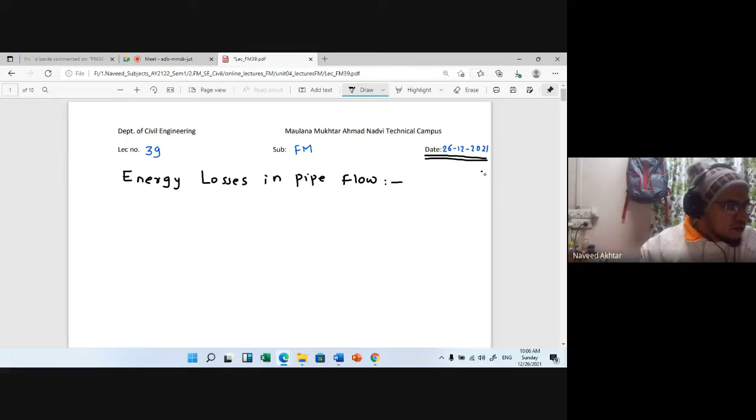The major loss of head in a pipeline, whereas loss of head due to changes in pipe section, bends, fittings, valves etc., constitute what are called the minor losses of head. We have already seen this: the major loss is due to friction loss, and minor losses are due to bends, change in cross section, and exit or entry to the system.

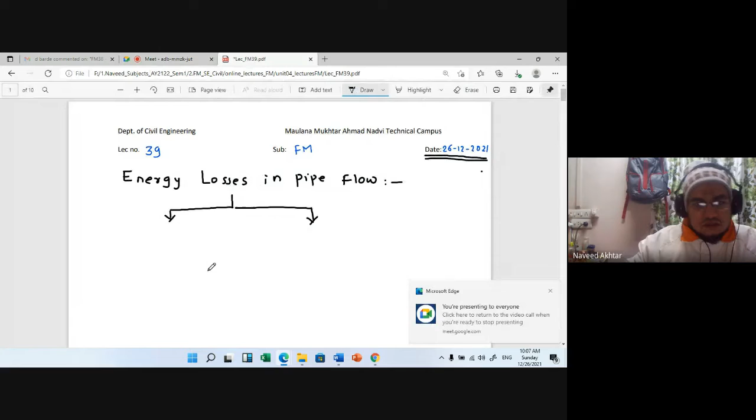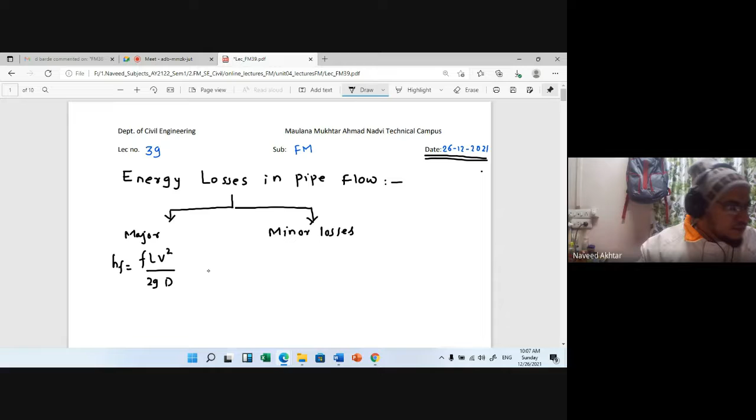So this major loss in terms of friction factor we find out with the Darcy-Weisbach equation, that is F L V square upon 2GD. And there are many minor losses which depend on the length of the pipe and diameter of the pipe, etc.

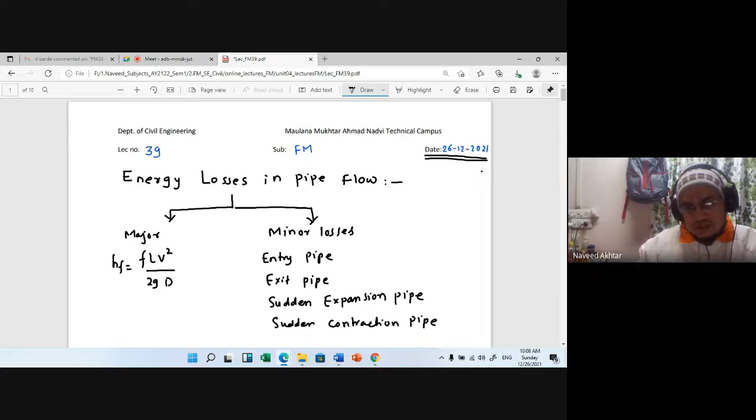These minor losses are nothing but: loss due to entry to the pipe, exit to the pipe, sudden expansion of pipe, and sudden contraction of pipe. The sudden change in diameter of the pipe means, if smaller diameter changes to larger diameter, it is sudden expansion, and if from larger diameter to smaller diameter, it is sudden contraction. This loss is due to the contraction or expansion of the pipe.

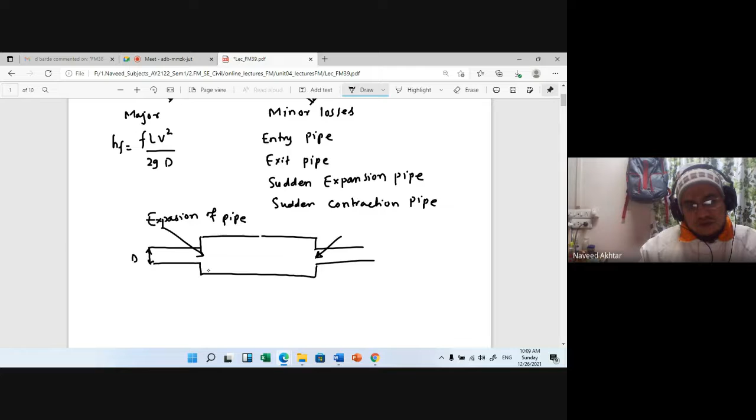Consider a pipe with smaller diameter D1, then D2, then D3. From D1 smaller to D2 larger is the sudden expansion case. At entry of the pipe there is loss, at exit of the pipe there is loss, and between the pipes there are friction losses, which we denote as HF. So HF is the friction loss into the pipe. These are the major and minor losses into the pipe.

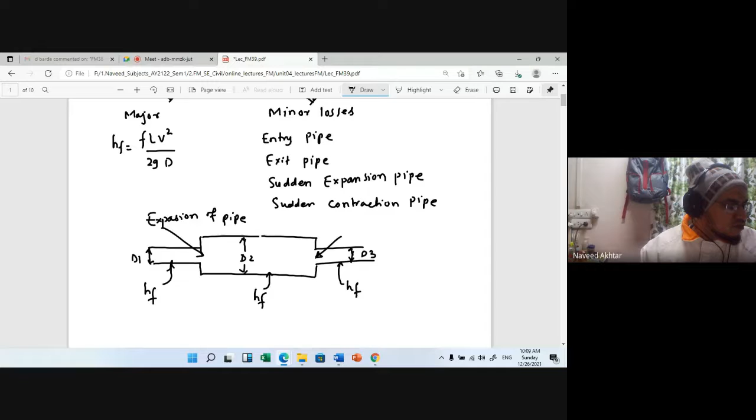We know that the equation for the Darcy-Weisbach friction loss is HF equal to FLV square upon D into 2G. I will call this equation number 1.

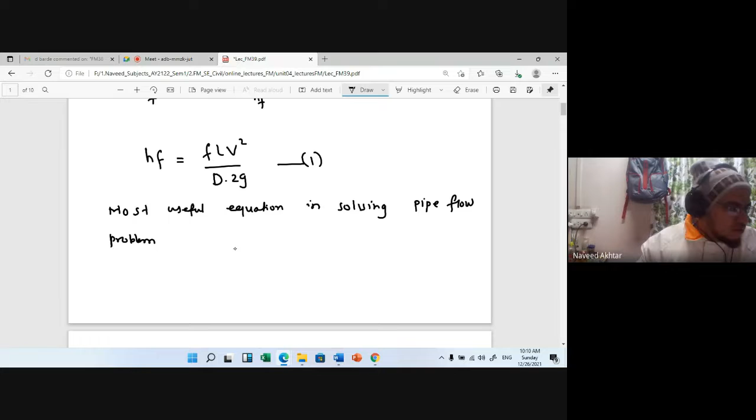The most useful equation in solving pipe flow problems is Bernoulli's equation, or Bernoulli's theorem. It states that Z, the datum head, plus P upon gamma, the pressure head, plus kinetic energy head V square upon 2G, is equal to constant, which is Bernoulli's theorem.

This is to be applied to a specific point. If applied at two specific points of a pipe, for two sections of the pipe having a length of L apart, one along the pipeline, then it can be written as follows.

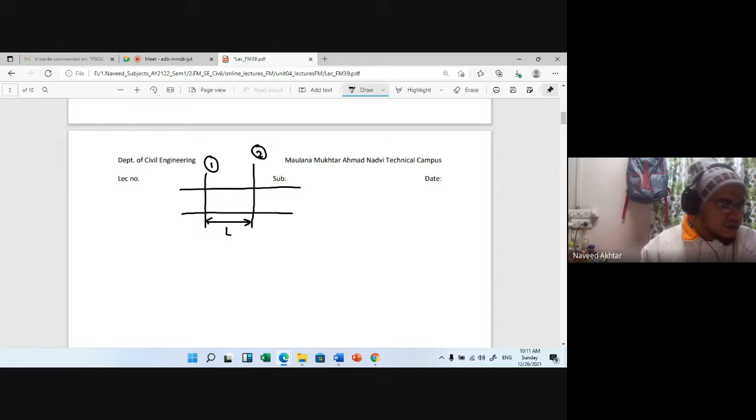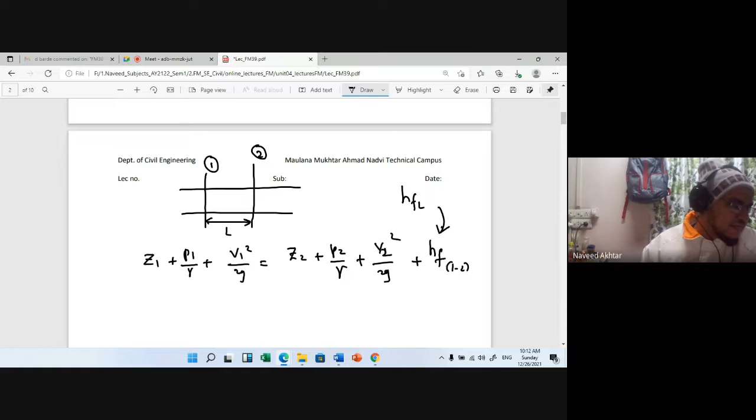Z1 plus P1 upon gamma plus V1 square by 2G is equal to Z2 plus P2 upon gamma plus V2 square upon 2G, plus HF between 1 and 2, the distance apart being L. You can write this as head loss HFL, or HF between 1 and 2. This is nothing but the Darcy-Weisbach equation form, the major head loss due to friction.

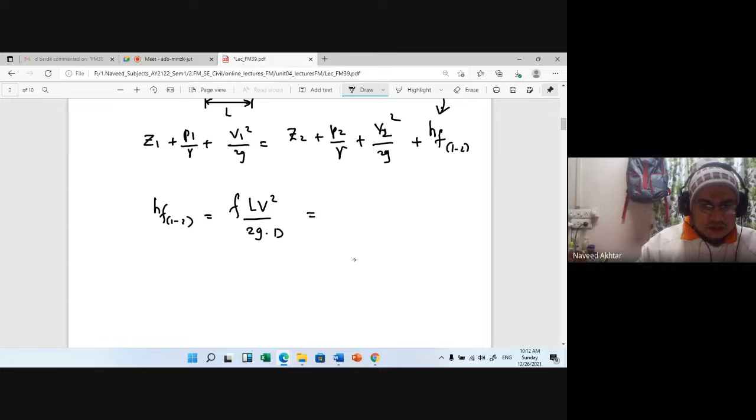It can be said that the major loss of head due to friction is caused by the flow of liquid over a pipe of length, which we denote with capital L.

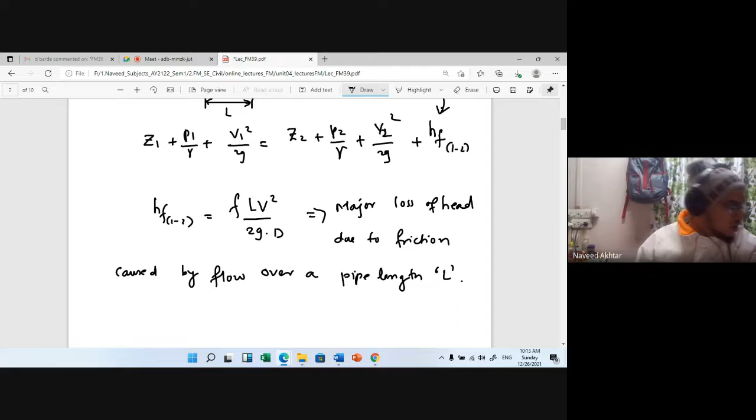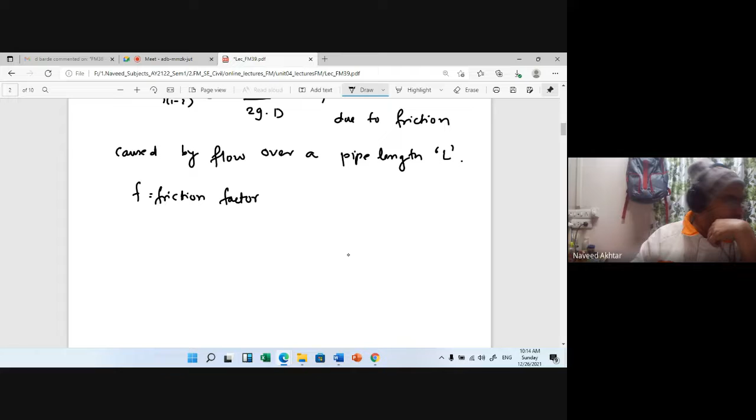Here the F is nothing but the friction factor. We have seen that this F is not specified; its value can be taken in between 0.015 to 0.02, and preferably it is taken as 0.02.

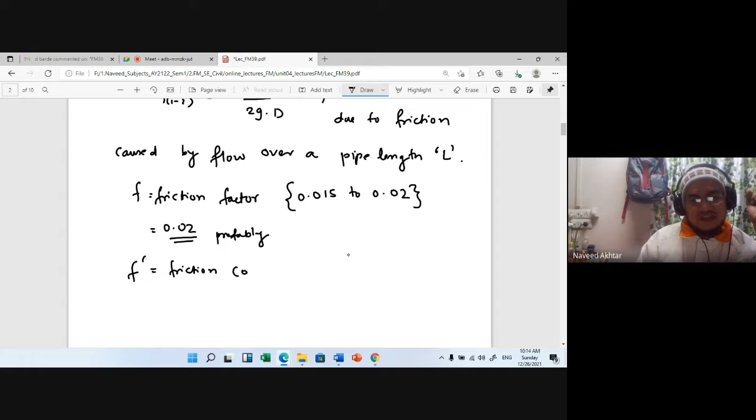But in case if friction coefficient f dash is given instead of friction factor, we are using the formula: f is equal to 4 times f dash. So f dash is equal to f by 4, or you may write it as 0.25 of f.

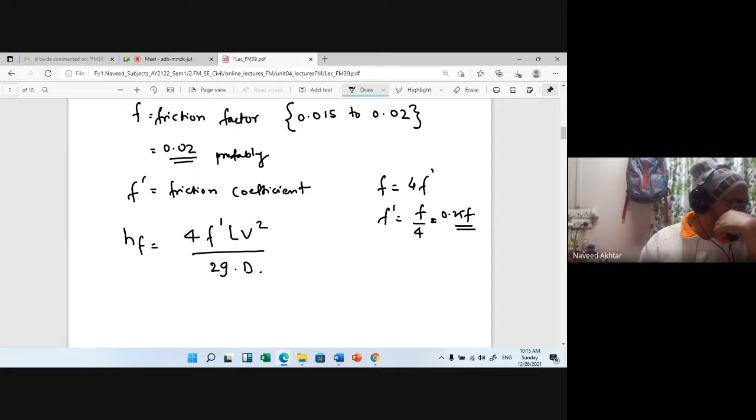So you can write down this formula for the head loss between the pipe flow sections 1 and 2: 4 f dash L V square upon 2g into D. The f dash value, remember, it is 0.005.

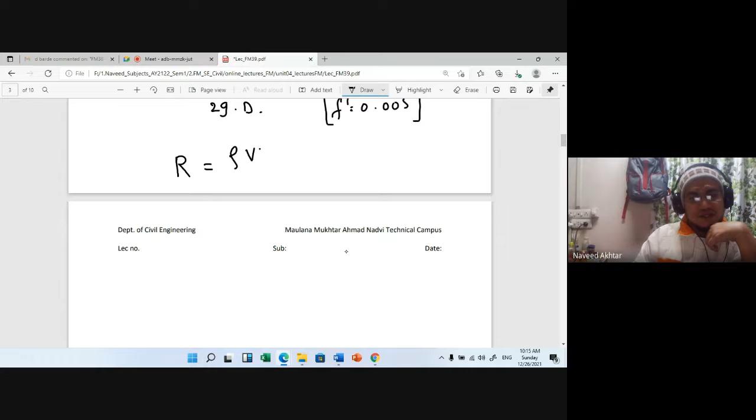Reynolds number is the most important number for a pipe flow system, and it's calculated as rho VD upon mu. This we have already seen in previous units. Reynolds number proves the flow pattern, so it is very important to differentiate between laminar, transition, and turbulent flow. It depends on the inertia force and the viscous force.

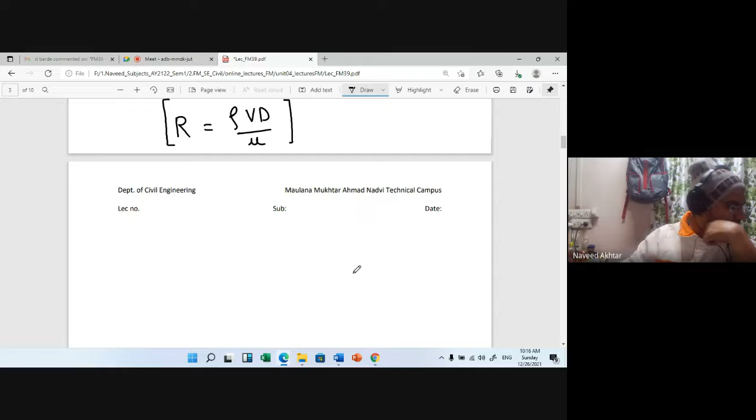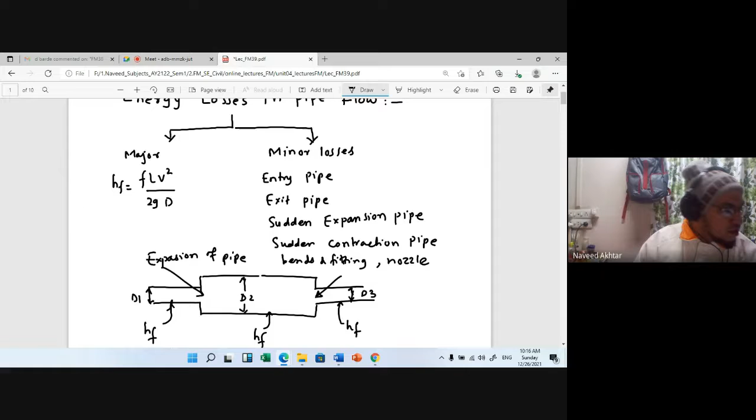Head losses occur on account of sudden contraction, sudden expansion in the pipe, and with pipe bends and fittings. These are the minor losses; major losses we have already seen. Bends, elbows, T-joints, and nozzles cause minor losses. This is already covered as the major loss we have seen in previous lectures, using the Darcy-Weisbach equation for the head loss.

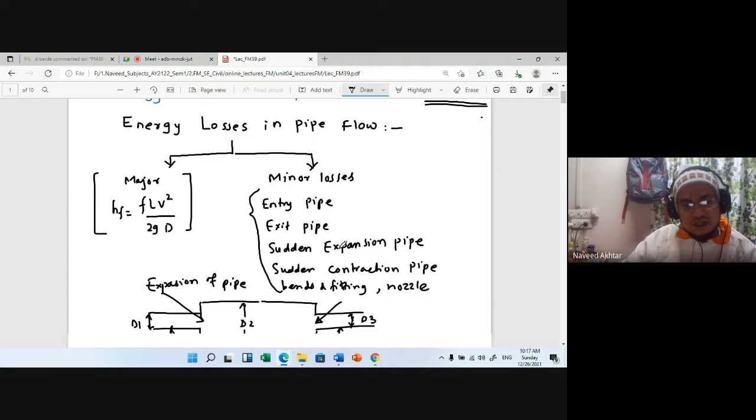Now we will see today the sudden expansion and sudden contraction of the pipe losses, that is, minor losses. From this derivation we can also derive other losses. So first we will go for...

Students, they are joining late. If I miss your attendance, don't mind, because you are disturbing the class.

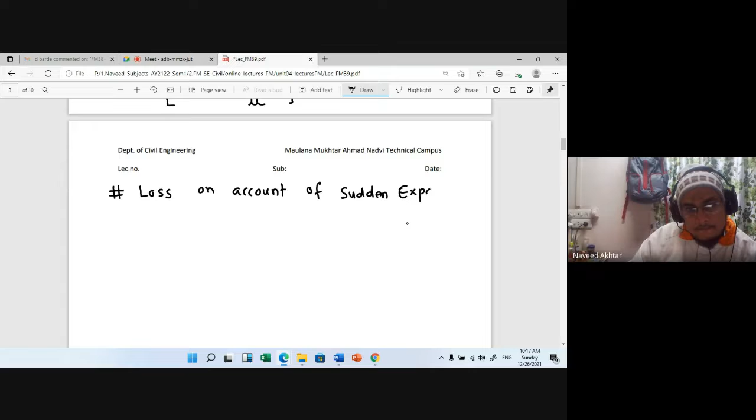So we will see first the minor loss on account of sudden expansion, sudden expansion. For that we have to draw the figure.

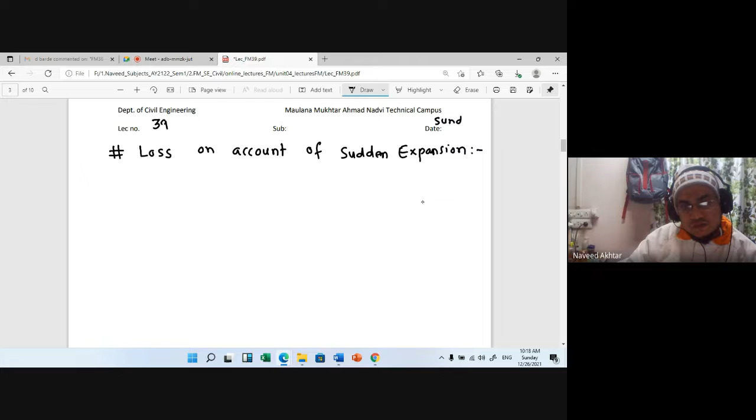Draw the figure first, draw with me. Draw this figure showing flow through the smaller pipe. Suddenly what happened? A change in the dimension of the pipe occurs — the smaller pipe merges with the larger pipe.

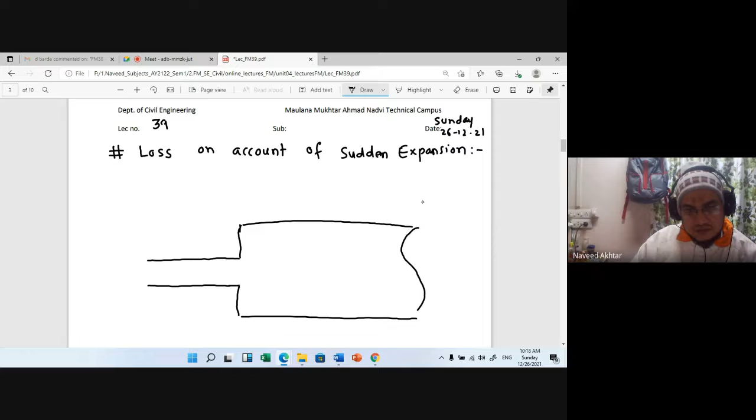The smaller pipe merges with the larger pipe. This is your pipe — smaller diameter pipe merging with the larger diameter pipe. So you have to draw this figure, please draw carefully.

The discharge flows through the pipe of diameter D1, the smaller diameter pipe. The large diameter pipe I will write as D2 — capital or small letter, depends on you. And I will take three sections here, starting with Section 1.

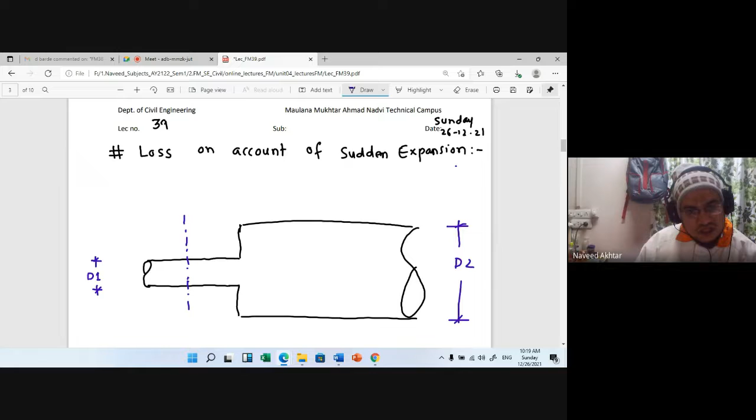Section 1 is at the smaller diameter pipe. One other section I will take where the vortex formation occurs. Then another section I will take at the change in diameter, from smaller to larger pipe, and I will call that Section 2. So this one is Section 1 and this one is Section 2.

The liquid or fluid is flowing through the pipe. Because the pipes are in series, the discharge will not change. In the first section, it is moving with velocity v1. Then the discharge Q continues and exits into the pipe, having velocity v2 in pipe 2.

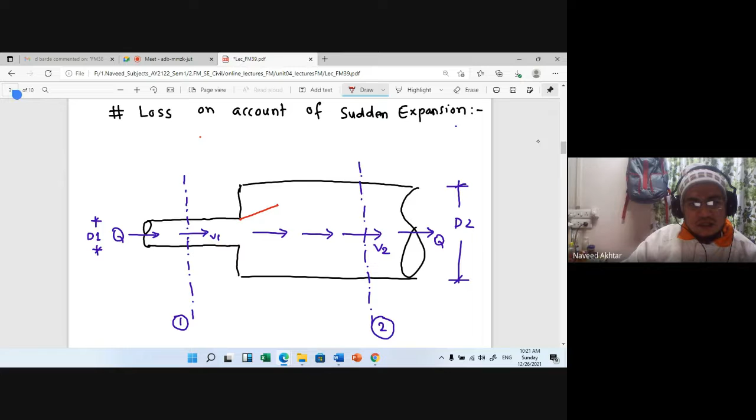So this is the flow through the pipe. I will also draw this liquid flowing through the pipe. Then, due to the sudden expansion, what happens? The flow also expands until it reaches Section 2. This is the flow.

This merges with the same diameter of pipe 2 at Section 2, where it will also be broken. So gradually the flow reaches and adjusts itself to the diameter of the pipe, and vortex or eddy formation occurs due to this sudden expansion of the pipe.

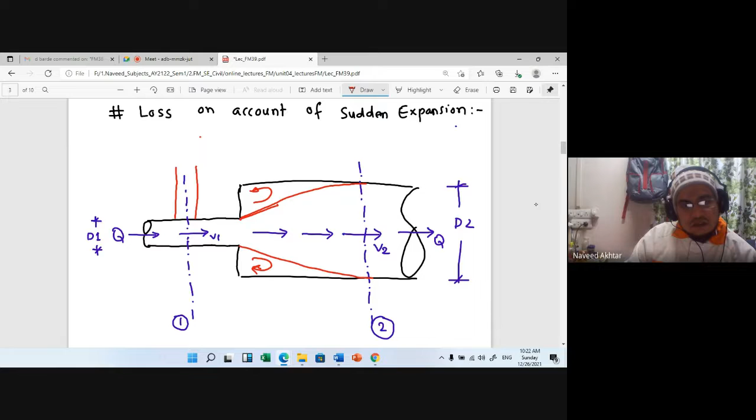So these are the sections, and if you measure the head, you can see the pressure head here, the pressure head here, and the pressure head at Section 2.

Okay, so the level maybe at the start it will be here, then it will slightly increase here, and here also due to the enlargement of section it will increase here. So I will dash this level of the pressure level of the pipes with the bottom. Okay, so this from the center of the pipe, this one, the pressure head P1 upon gamma, and here from the bottom you can write down from here to here it is P2 upon gamma, that's pressure head, and then if you draw the diagram, it will be like this, and it changes. Okay, and the control volume I will write down this from A, section A, then B, C.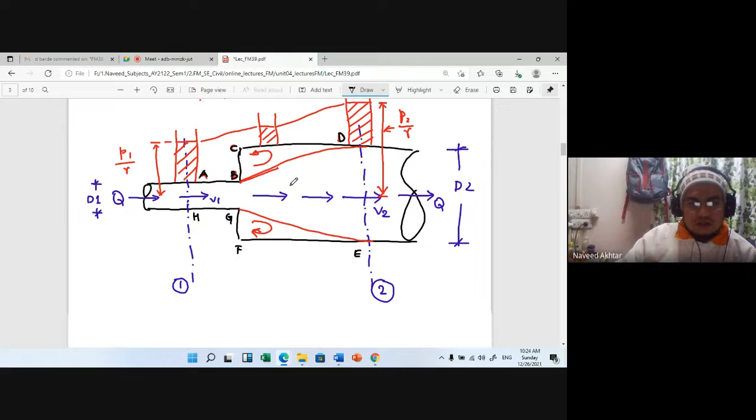Here diameter is changing here. Okay, diameter is changing A, B, C, and then here I will write on this D, D. Or better I will change the color. Okay, understand. A, A, B, C, D, and here I will say it is E, F, G, and H. So this is control volume, and this figure is very important. This figure you have to draw carefully. I think so. This figure is clear to you.

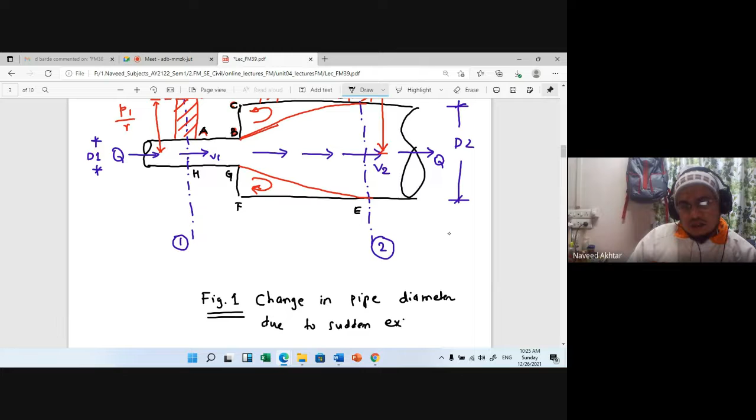Uh, you can consider a pipe. I will not write the description, description you will get in my notes. So here you can see the consider a pipe of diameter d1 has to get enlarged suddenly to the diameter pipe d2. Then at entry into the large pipe, we find that lot of turbulence and eddy formation coupled with the loss of energy. Yeah, due to sudden expansion of pipe. This is mainly due to separation of streamline from the boundary as the velocity in larger pipe for same discharge through smaller larger pipe will be lower.

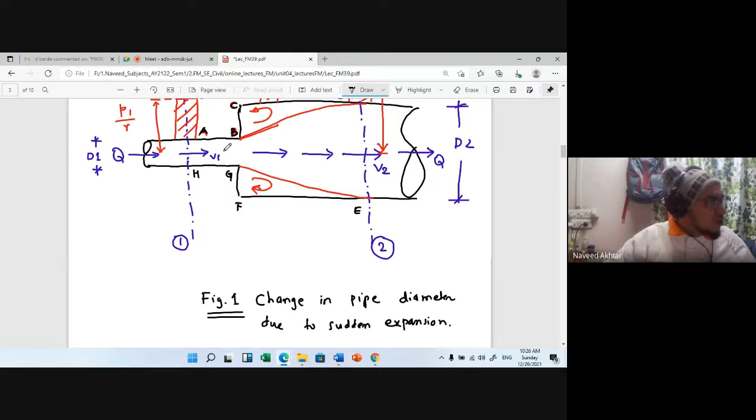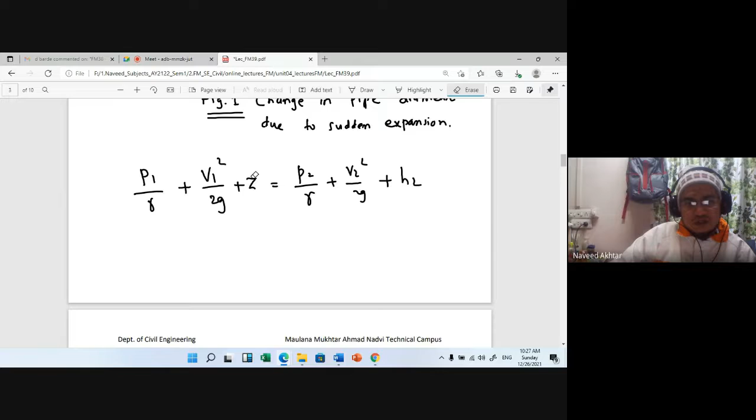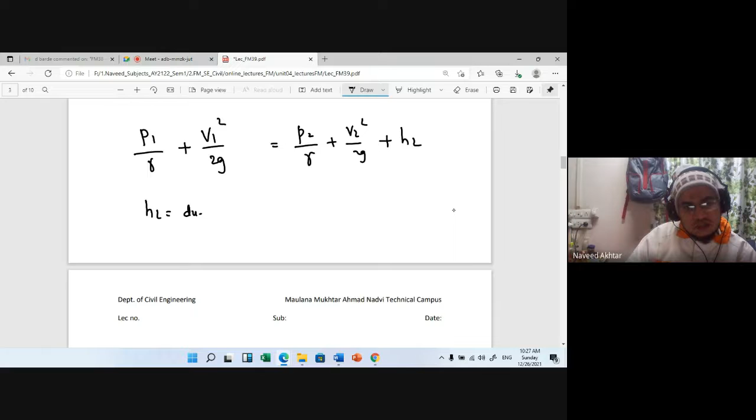So velocity will be reduced from the smaller pipe to the when it converted to the larger pipe. The velocity will not be same. Okay, but the pipe is horizontal, therefore the datum is same. That is Z value will not be considered in the Bernoulli's theorem. So this will be clear from the application of Bernoulli's theorem between section 1 and 2 as shown in the figure. So if I write down the head, Bernoulli's equation for this sudden expansion: P1 upon gamma plus V1 square upon 2G, because Z is same, P2 upon gamma plus V2 square upon 2G and plus this loss. So this Z will not be there, it is same due to the horizontal line. So no need of writing this, as in the case of Bernoulli's equation we are writing. So datum is same, and the datum head Z is same as pipeline is horizontal, and HL is the loss due to sudden enlargement. So this is HL here, and loss due to HL is due to sudden expansion into the pipe diameter.

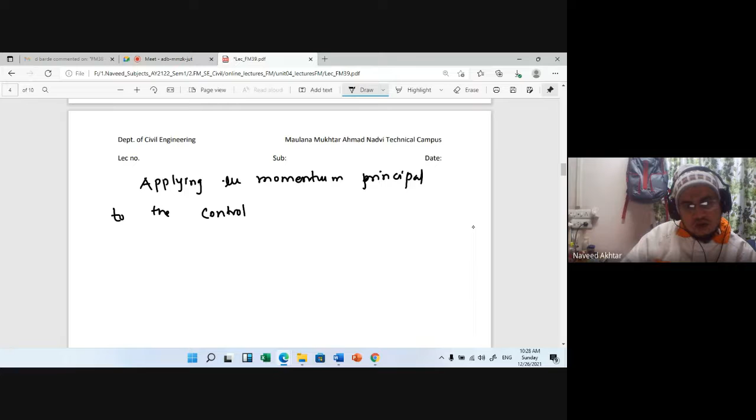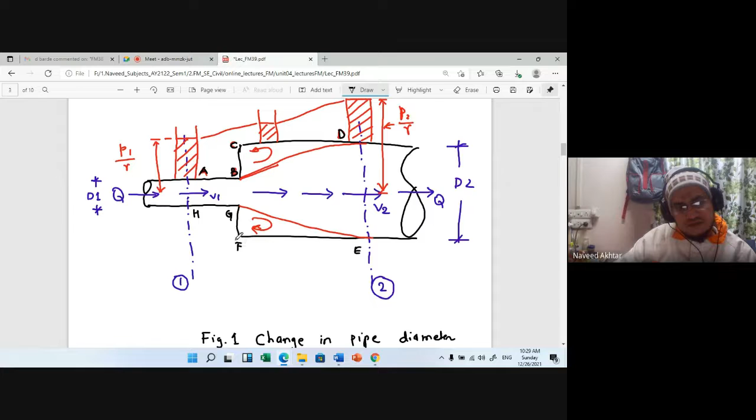Now applying the momentum principle, applying the momentum principle. Only momentum principle, you know, M into V, M1 V1 is equal to M2 V2. That is the momentum principle, to the control volume. We are considering from A, B, C, D, E, F, G, H. This is the control volume, from this equation you can see from A, B, C, D, E, F, G, H. This is the control volume. Okay, we are considering for the study, and assuming that the annular space CD and GF...

Here's the equation: rho into Q into V2 minus V1 is equal to P1 A1 plus P1 into A2 minus A1, the change in the diameter. So larger diameter is A2 and smaller is A1. So A2 minus A1, minus P2 A2. Okay, so if we write down this P1 A1 plus P1 A2 minus P1 A1 A2 minus P2 A2. Okay, so P1 A2 minus P1 A1. P1 A1. Minus plus, this will be cancelled. So it will be P1 minus P2 into bracket.

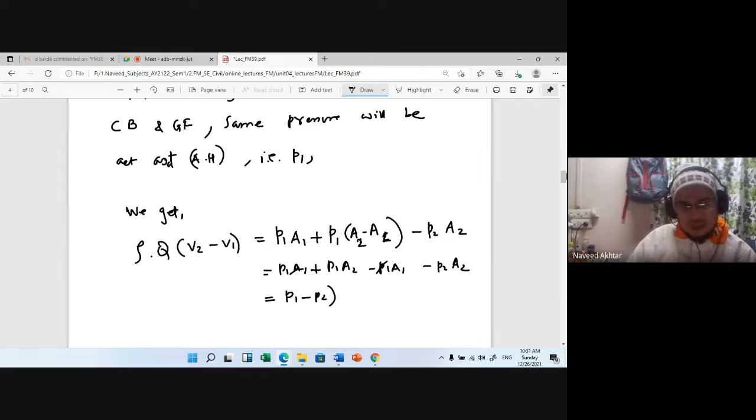This is A2. So if I will write down the term in terms of the pressure head, that is P1 minus P2, change the pressure head, section 1 and 2. So this A2 will become here rho into Q by A2, in bracket, V2 minus V1. Now, as we know, average velocity V2 is equal to Q upon A2. So I will write down P1 minus P2 is equal to rho into V2, V2 minus V1. Okay, so if you write down the HL, the head loss due to the sudden expansion, if you write down the P1 minus P2 upon gamma plus V1 square minus V2 square upon 2G. Okay, this equation from equation number 3, earlier we have written here.

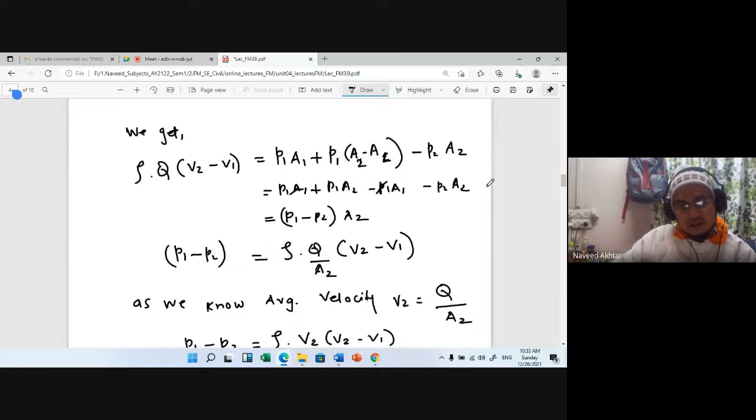Here it is on the equation. From this equation, from the equation you can, in terms of HL, write down P1 minus P2 upon gamma plus V1 square minus V2 square upon 2G.

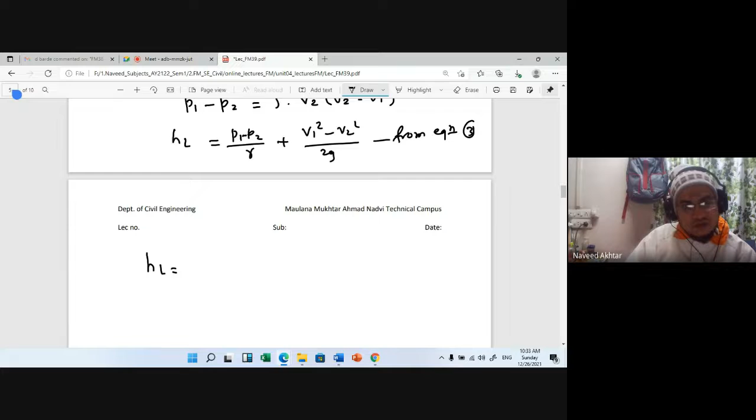So likewise it is just written here the same equation in terms of HL. Now we know the P1 minus P2 value, you can put the P1 minus P2 value. We have just calculated, that is rho into V2, V2 minus V1 upon gamma.

And you know gamma is nothing but rho into G. So I will write down here rho into G, plus V1 square minus V2 square upon 2G.

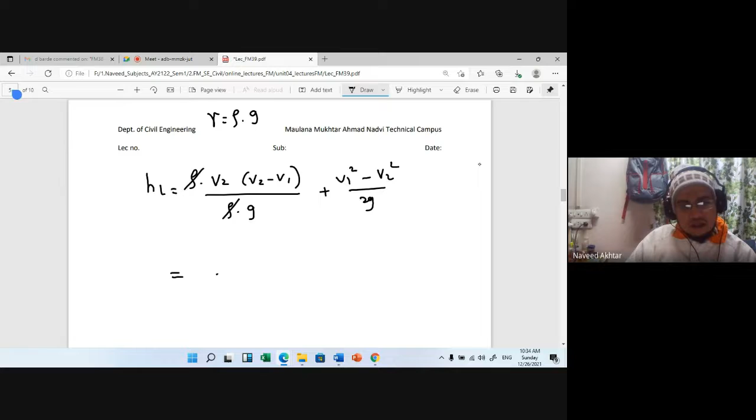Now this rho will be cancelled. So I will take 2G common. So here G is there, multiplied by 1, this value will multiply by 1, and this will multiply by 2G.

So it will be, if you write down, if you have taken the 2G common, so it will be multiplied by 2. So 2V2 square minus 2V2V1, plus V1 square minus V2 square. So these two terms are having same, 2V2 square minus V2 square is nothing but V2 square. I will write down V2 square minus 2V2V1 plus V1 square upon 2G.

Now you know this mathematical term. If you expand, I will just show for mathematics, then you can understand that A minus B, A minus B whole square. So what will we do? A square minus 2AB plus B square. This is the mathematics.

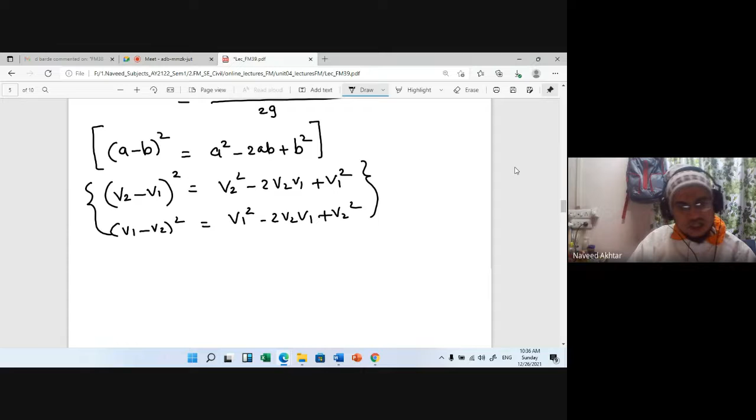Write V1 minus V2 square, it will also be the same, V1 square minus 2V2V1 plus V2 square. Either you write this or this term, no issue, but the higher value will be written first. So you can write down this HL is equal to V1 minus V2 whole square upon 2G. This is our equation number 4.

This mathematical term you should know. So if I will write here, you should understand that this is higher velocity minus lower velocity, whole square upon 2G, is nothing but head loss due to.

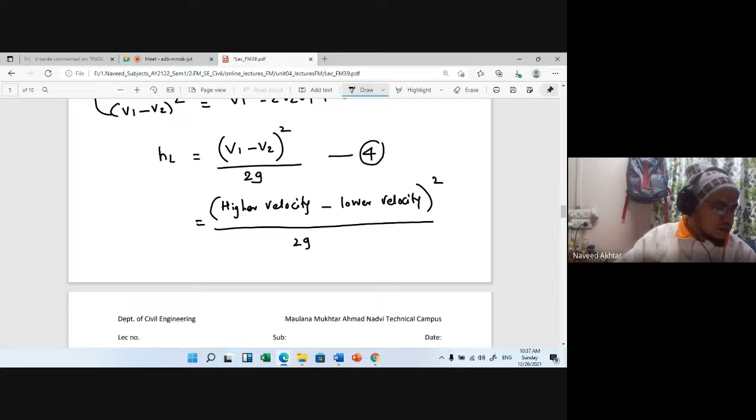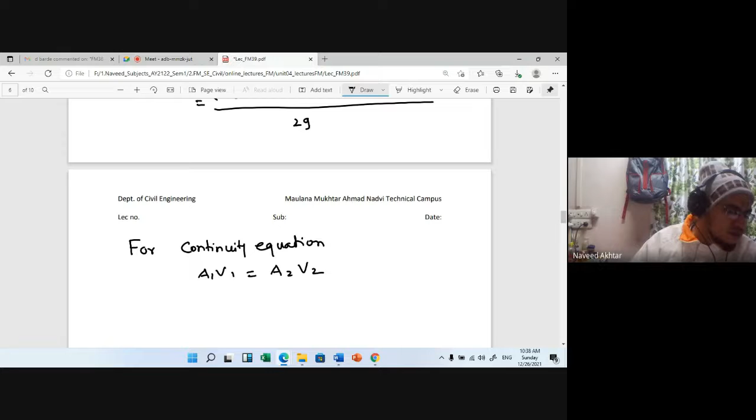Now we know that, for continuity equation, for continuity equation of the control volume, you can say. So you know that A1V1 is equal to A2V2, because discharge is constant in the pipe in series. So you can write down like this.

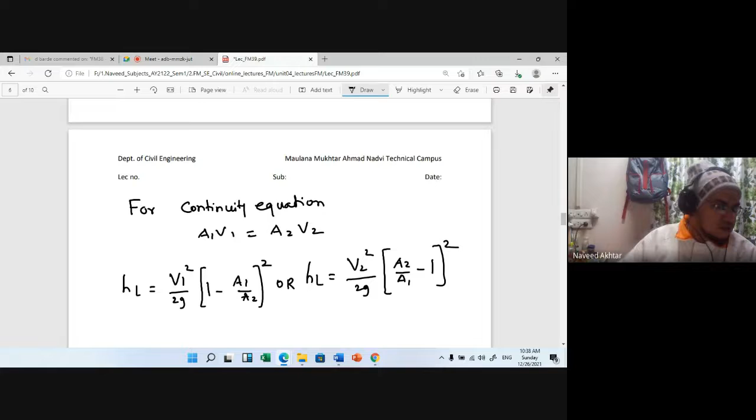If you put it in terms of V1 only, for your HL in terms of V1, V1 square upon 2G, it will be 1 minus A1 upon A2, the bracket square. Or you can write in terms of V2, so it will be HL is equal to V2 square upon 2G, but here it will be reverse, A2 upon A1 minus 1 whole square. So any of the terms you can say, it is equation number 5.

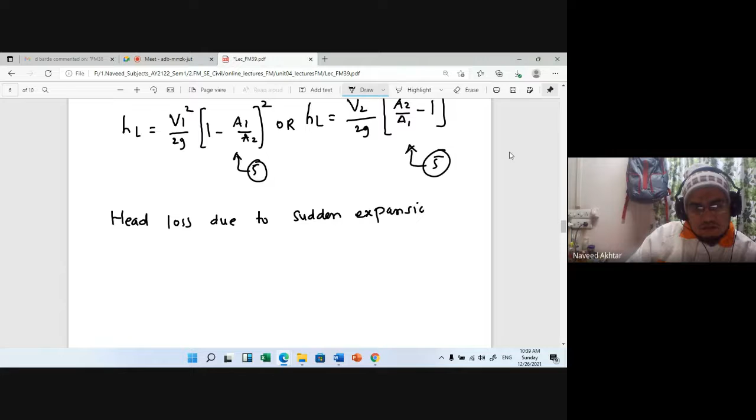Equation number 5. So head loss due to sudden enlargement is given by: head loss due to sudden expansion or enlargement of pipe is given by equation 4 or equation 5. So this is nothing but loss of head due to sudden expansion.

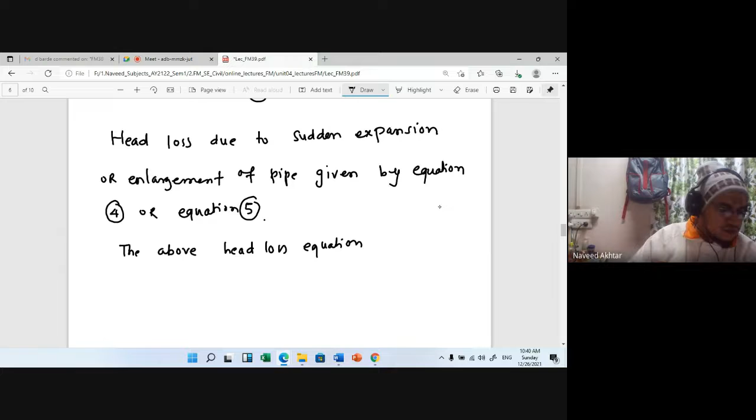This was first developed by, the above loss equation was first obtained by the scientists Borda and Carnot. That's why this equation is also known as, hence it is known as the Borda Carnot equation, head loss equation.

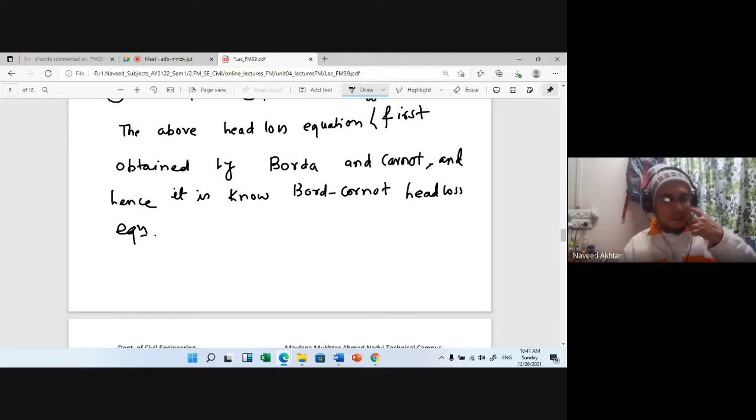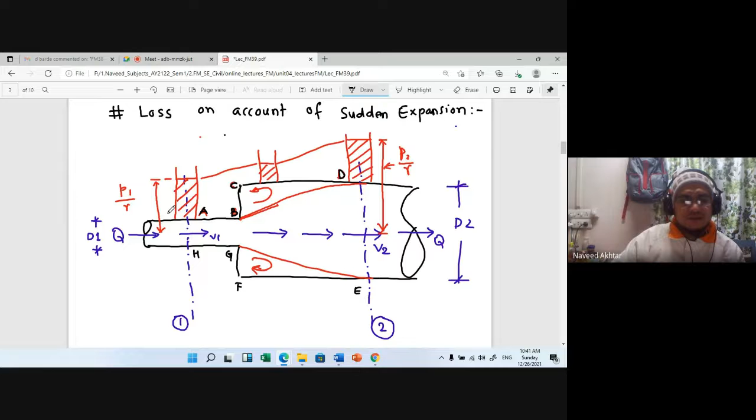So this is nothing but due to the sudden expansion of the pipe. Now, if you see this is due to sudden expansion, and exactly the opposite case happens if the pipe is large and then the diameter of the pipe is reducing. So that is called sudden contraction.

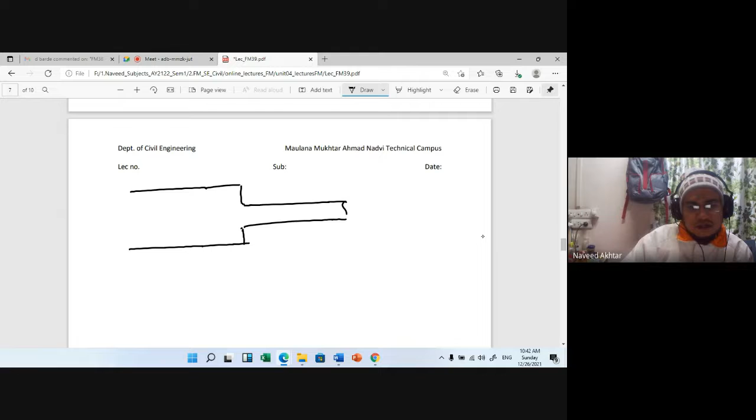So in sudden contraction, what happened? This is the pipe having large diameter, and then suddenly the pipe reduces. So this is the case of sudden contraction. So if you make a figure, this is a case of loss due to sudden contraction of the pipe.

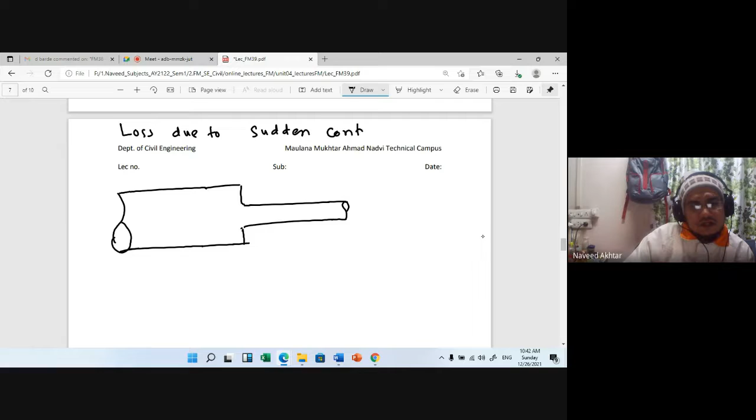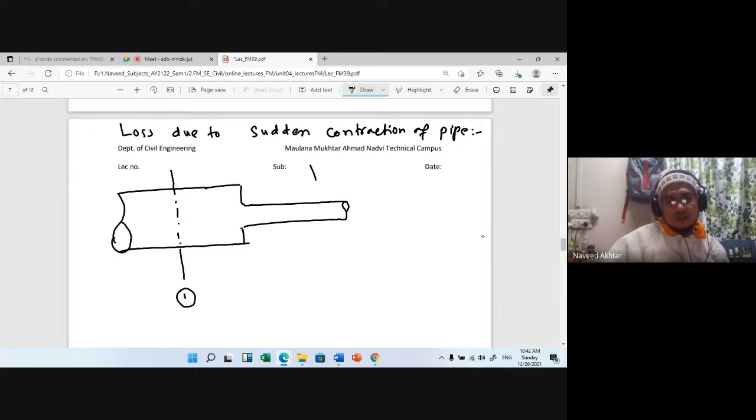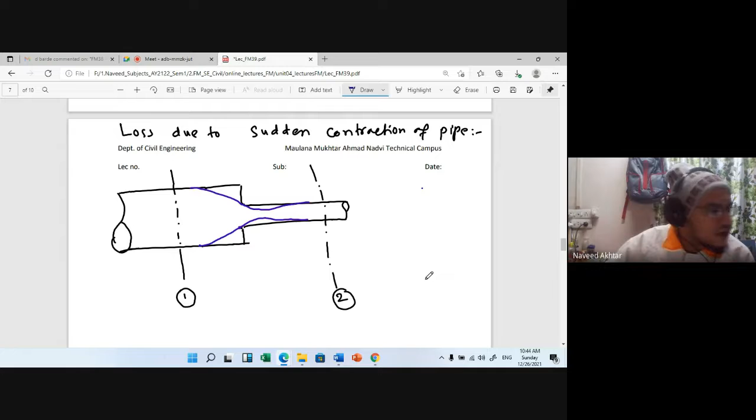Okay, so at section 2 when it reaches, then it will be... Here the formation of vena contracta is the contraction of this flow at this level. It is called vena contracta.

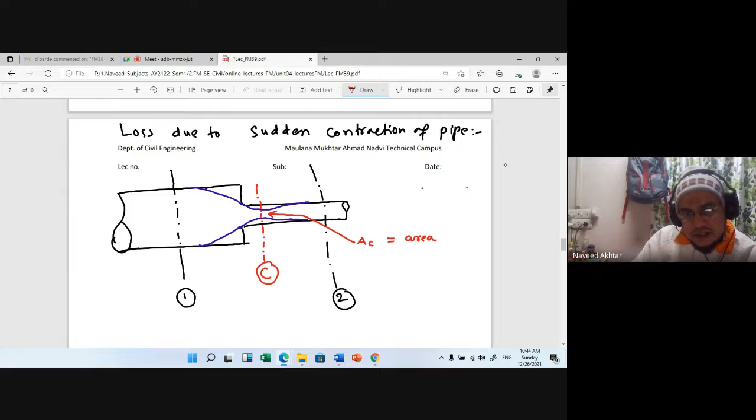I will make another section where the contraction of the flow takes place, and this section is C, the vena contracta. The area here is AC, the area at the contraction of the flow. It is called the area at vena contracta.

This area is nothing but CC into A2, because it merges with the area A2. This is diameter D2, and so area A2, and this is diameter D1 for the larger pipe. So here it is area A1, and here area A2, and AC is the area at vena contracta.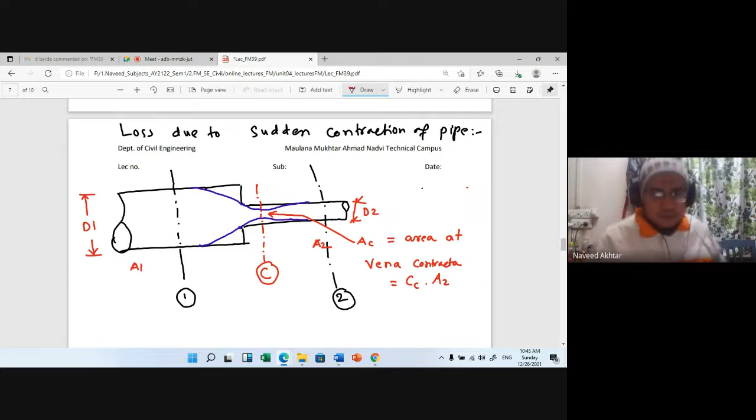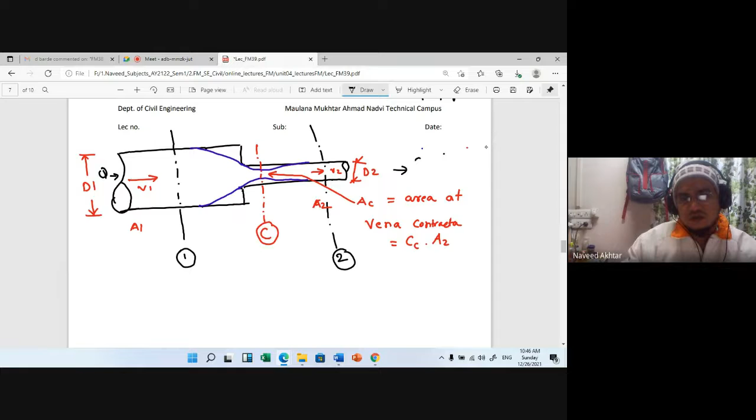So if you see, what happened? The flow from the larger pipe converged to the flow in the smaller diameter pipe, and due to that there is some formation in this flow. Contraction of the flow takes place, and the velocity in this flow is different. It is V1, and here it is V2. Discharge is the same, it is nothing but the Q entering the pipe and exiting the pipe, because now some head loss is there.

When flow from a larger diameter pipe takes place into a smaller diameter pipe, the loss of head is known as loss due to sudden contraction. The fluid entering into a smaller diameter pipe will have its streamlines converge up to vena contracta and then expand gradually till fully established flow at section 2 takes place.

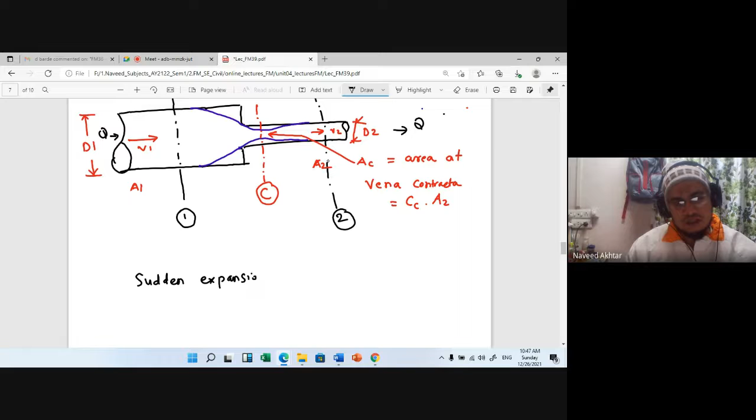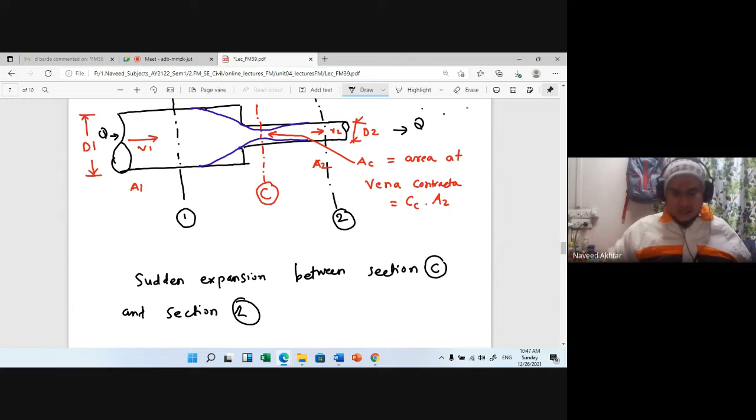Thus, this is actually a case of sudden expansion between section C and section 2. So it is a case of sudden contraction of the pipe, but you can say it is a case of sudden expansion between section C at vena contracta and section 2, the smaller diameter pipe.

Then the head loss we can write from the above equation: HL due to contraction equals V2 square upon 2G, with A2 upon AC minus 1, that whole square.

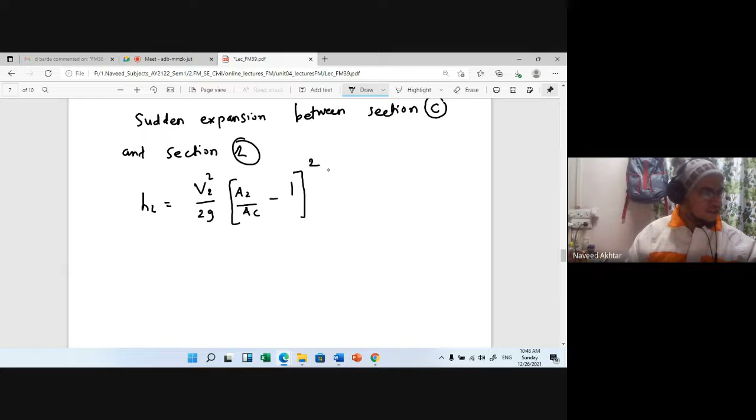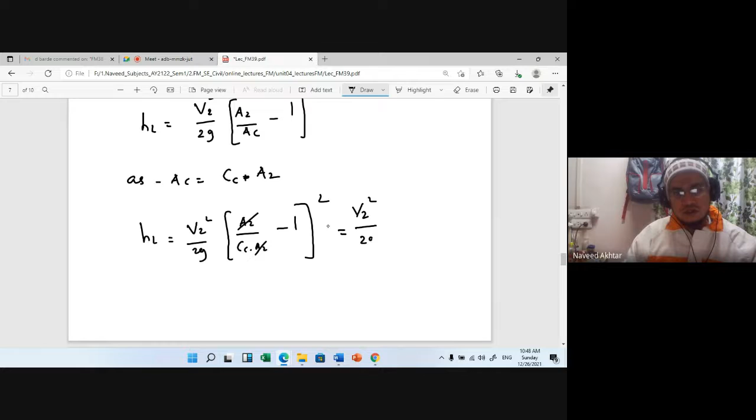Because AC is equal to CC into A2, you can write the head loss in terms of CC. So HL is equal to V2 square upon 2G times (A2 upon CC into A2 minus 1) whole square. This A2 will be cancelled. So HL, the loss due to sudden contraction into the pipe, is nothing but V2 square upon 2G times (1 upon CC minus 1) whole square, where CC is found from the diameter of vena contracta.

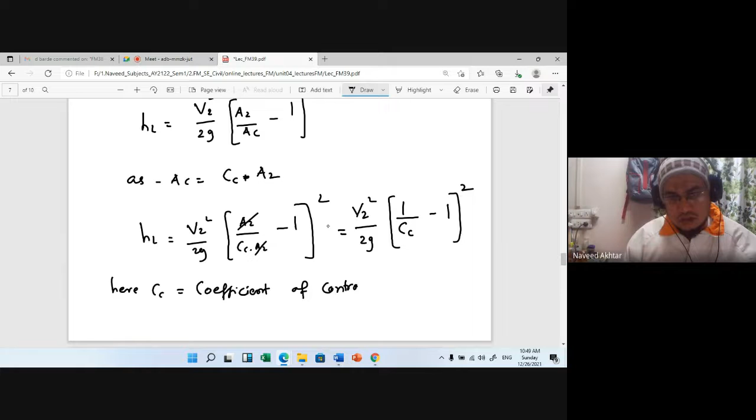CC here is the coefficient of contraction. Its value is generally 0.6. So 1 upon CC minus 1 whole square is generally coming as 0.45.

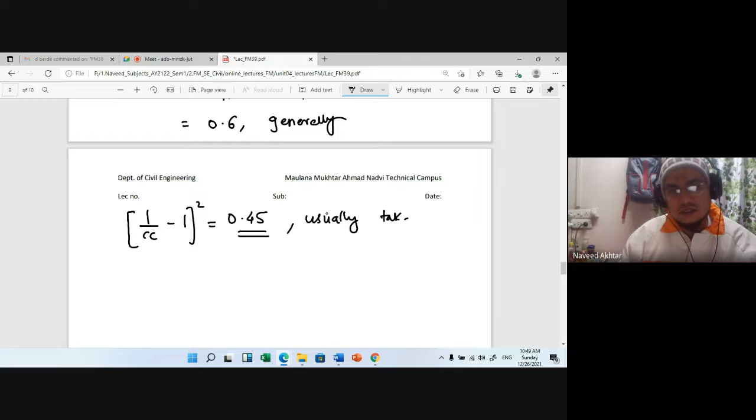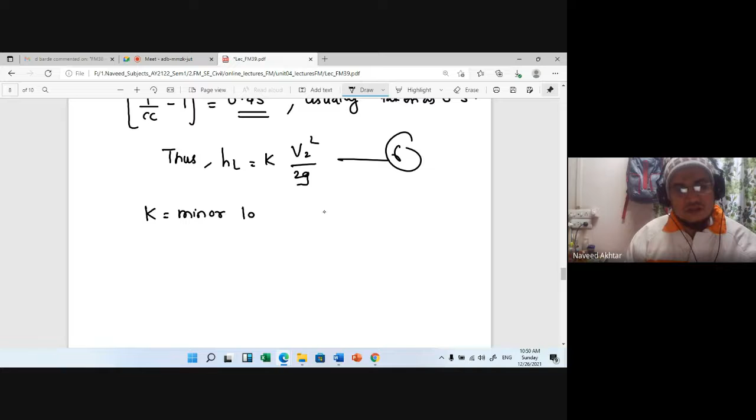Usually it is taken as 0.5. Thus HL in case of sudden contraction is nothing but K times V2 square upon 2G. This is equation number 6, and K is the minor loss coefficient.

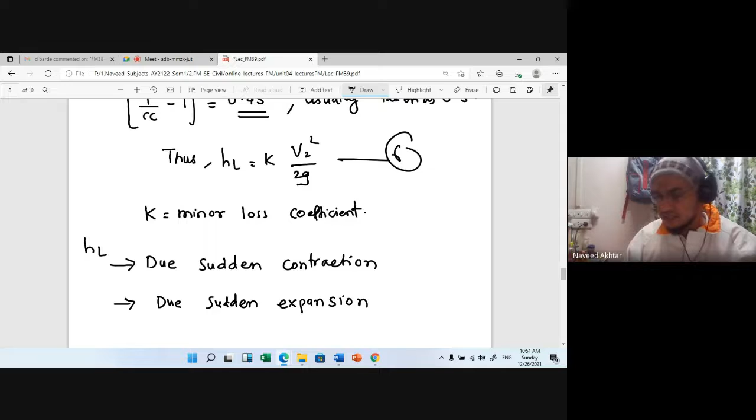So this is our loss of head. We have seen the loss of head due to sudden expansion, and this one, the loss of head due to sudden contraction. So the derivation you can make like this. Now for the other minor losses we will not go for the derivation. We will see those, and then we will go for the hydraulic gradient and energy gradient.

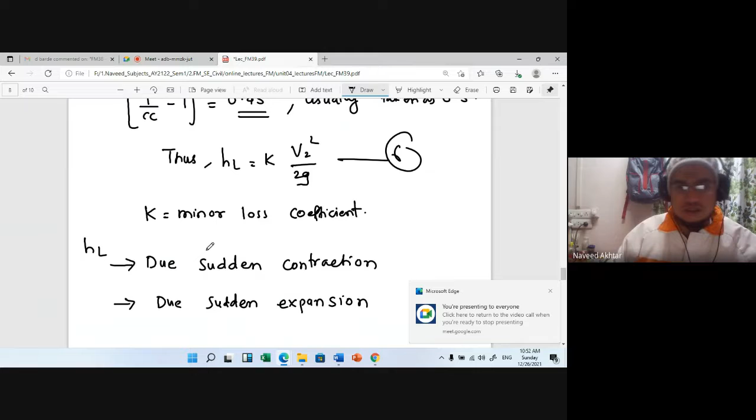You understand this, and then we will see what is the hydraulic grade line. Already hydraulic gradient and energy gradient, that is total energy line. Also, energy gradient is also called the total energy line, and we will see what is the hydraulic gradient and energy gradient. So we will take the short break and start the second class.